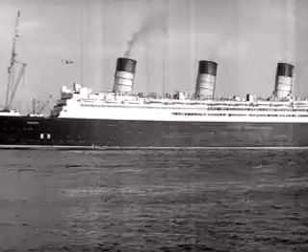The flash of power, the gleam of oil. In the sky, the power of oil conquering the heights. On the sea, the might of petroleum pulsing in great engines of the liners that traverse the deep. On land, oil feeds the fiery furnace or drives the diesel engines along far-flung rails of steel. And on the open road, well, you know what makes your auto run.

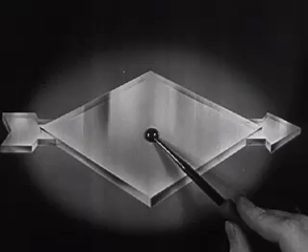For millions of years, this source of power slept peacefully in the dark recesses of the earth until modern magic loosed the liquid energy from its subterranean prison. Great areas became forests of towering derricks. And here's how the petroleum forest grows.

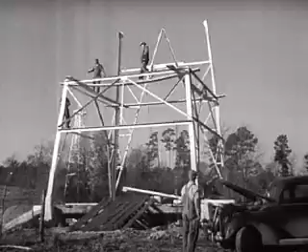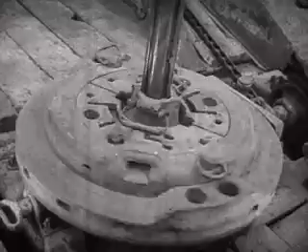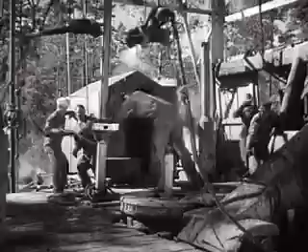A cellar is dug, and a rotary table to turn the drilling stem and the bit is set in place. Round and round the rotary goes, drilling deep down to oil. A steam engine drives the drilling mechanism. They're inserting a length of pipe, lengthening out the stem for deeper drilling. A new joint is waiting.

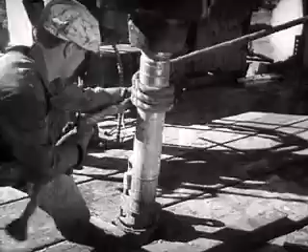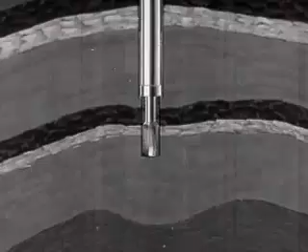Oil field workers are called drillers, roughnecks, roustabouts, rope chokers. The oil field treats our ears to odd and colorful names. Now the drilling stem has been lengthened, then round and round once more. Down through layers of sandstone, shale, limestone, down to astonishing depths. This well 5,000 feet. Some 10,000, 2 miles into the earth.

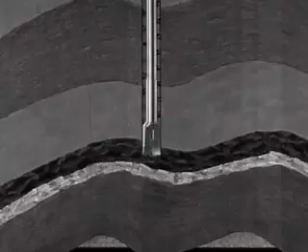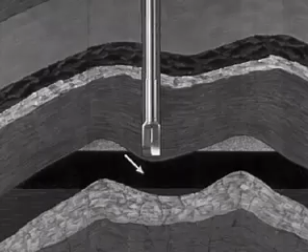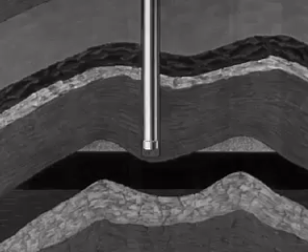And then, after weeks of drilling, fighting against natural obstacles, the drill at last reaches the oil sand, porous rock, which holds the oil much as a sponge holds water. Next, the casing is lowered to the bottom of the hole and cemented in position. Then drilled through the oil sand, and a screen is installed at the base of the casing. The screen extends down into the oil sand. The oil flows through the screen, up through the small pipe tubing to the surface.

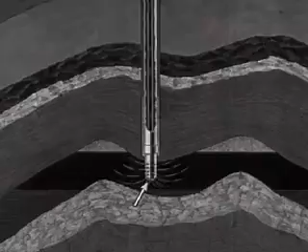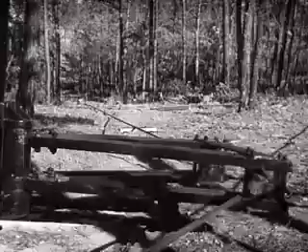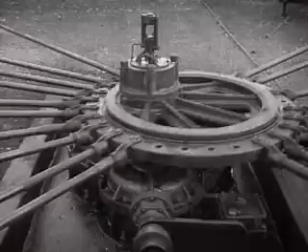So they've struck oil. And now the well must be cleaned of the mixture of drill mud and oil. Some wells flow of their own pressure. Others must be pumped, need power. The power is transmitted to groups of wells, the ever-swaying rocker arm, the rhythm of pumping, the unceasing heartbeat of the oil fields. A 24-well hookup is the height of oil field power. Pumping black magic from 24 drillings in the earth, all at the same time, out of the ground.

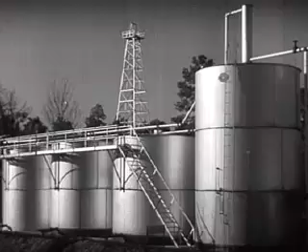The oil is cleaned of natural gas or water, which is combined with it. Next, the petroleum starts on its way through a great network of pipelines. There are powerful pumping stations every 40 or 50 miles to keep it moving along the lines. The lines of pipe, alive with racing oil, run through forests and over plains to these silver discs. They're storage tanks where the oil rests briefly before it rides the waves in giant tankers.

And they're masterpieces of shipbuilding, those tankers of steel. The largest navigate the sea at 15 knots and carry 5.5 million gallons of oil. The voyage of oil to the refineries. The refinery with its modern structures, technological towers, minarets of science, docks, office buildings, pageant of industry.

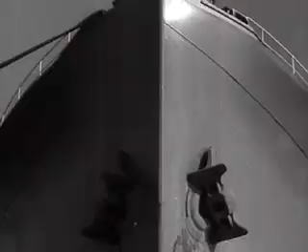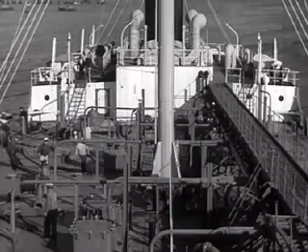Day after day, there is an endless flow of oil as the tankers discharge their liquid cargo. Unloading oil is a vast operation of piping through huge hoses. Discharge pipes on the vessel and receiving lines on the dock are connected, and a cargo of 5 million gallons is discharged in less than 24 hours. No two cargoes of crude oil are alike, so each boatload must be stored in different tanks, and each batch must be processed individually, with laboratory tests to indicate the precise treatment for each.

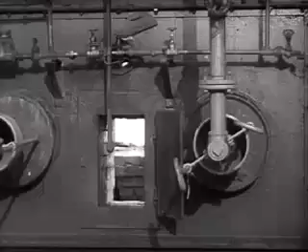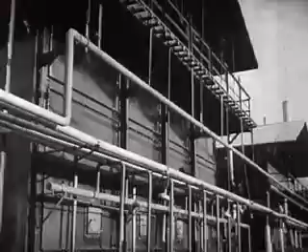That is embodied science. Those masses of strangely wrought steel, forests of stacks, glowering and hissing boilers, leaping and winking fireboxes. Intense heat, the flames roar in the furnace, yet the oil flows so fast the heat does not scorch it. And scientists wrest from the crude petroleum its tremendous power in the form of gasoline and other fuel oils. And that's done in these towers called fractionating towers.

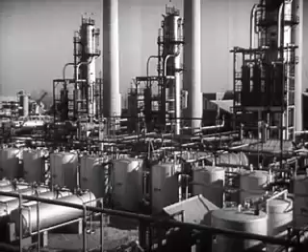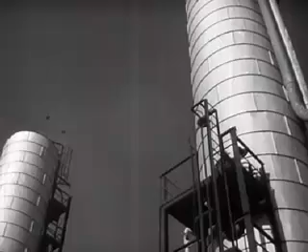They divide crude oil into the lighter and heavier parts. Those of different boiling points liquefy at different levels in the towers. Some lighter than gasoline liquefy at the top. Heavier parts liquefy further down. At the bottom are the heavy fuel oils, or the raw materials from which lubricating oils are made.

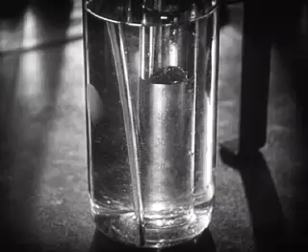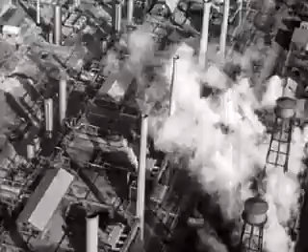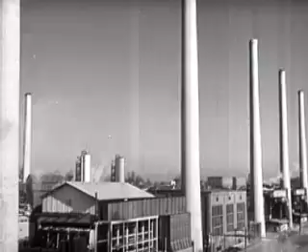When increasing use of motor cars pyramided the demand for gasoline to extraordinary heights, scientists were called upon to devise new methods. How could a greater proportion of gasoline be extracted from the crude oil than that obtained from the fractionating tower alone? To meet this challenge, the scientists turned to products other than gasoline which are drawn from the crude, studied their molecules, and found a way to change them, to turn them into gasoline. The result was cracking. Let's look at a diagram of a cracking plant.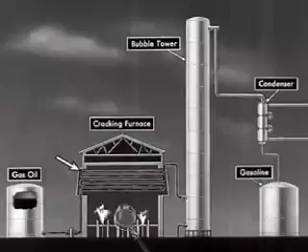Here we see how one part of petroleum that is not gasoline is converted into gasoline. Called gas oil, it is pumped through a pipe into a cracking furnace, heated to over 900 degrees under tremendous pressure. And the individual particles, molecules, are broken into smaller molecules, just as coal is broken under a hammer. If we could see one of those molecules, it would look something like this.

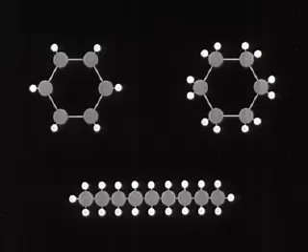The hotter the molecule gets, the faster it wiggles, until finally it wiggles so fast it flies apart. The pieces shoot around at great speeds. They eventually find partners and form new and smaller molecules that look something like this. These smaller molecules are now no longer gas oil, but are gasoline of high-powered, knockless quality. Some of the gas oil molecules do not fly apart and must be separated from the gasoline.

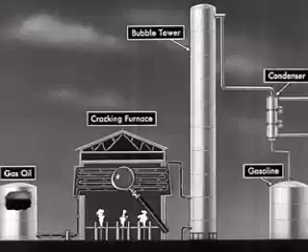This is done in the bubble tower. Here the big molecules, which are not gasoline, are held back and come out at the bottom as a liquid. The gasoline goes up the tower as a vapor, comes out at the top, and is condensed into liquid gasoline. Gasoline that gives more power to you.

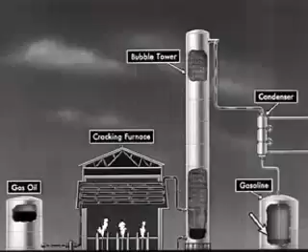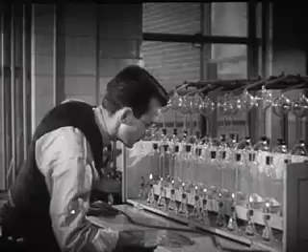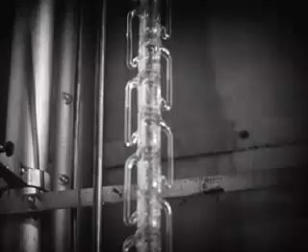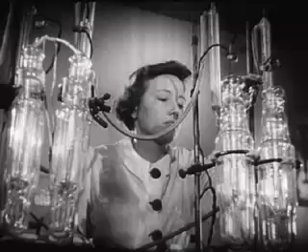Experiment is the key to it all, and this is the experimental laboratory. In the making of powerful motor fuel, the control of temperatures is of extreme importance, and it is measured to an accuracy of 1/100th part of 1 degree. Gasoline is broken down into over 200 parts in that elongated tallness of glass, and each individual part is studied. The laboratory with its strange gleaming of new and unpredictable things. Here are created modern miracles with the chemistry of oil.

Tank farm, to which the motor fuel goes from the refinery and then out to the nation by railroad tank car and by motor barge. Pipelines run their web-like nets under rivers, over mountains, carrying gasoline that goes into millions of gasoline tanks to generate billions of horsepower for the nation. Oil means horsepower in a horsepower-using world. Briefly, in 4 words, more power to you.